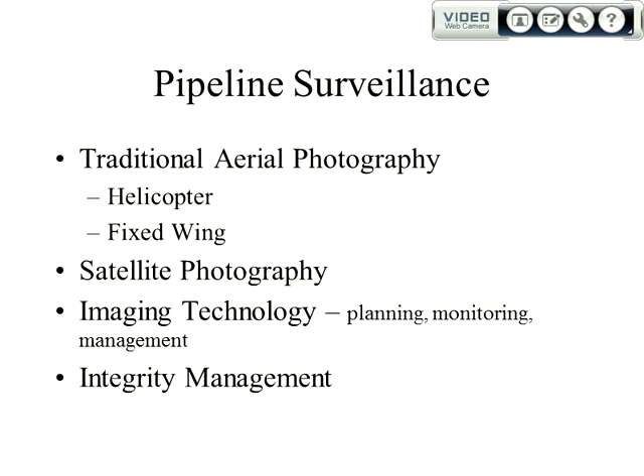This is what I have to find, but this isn't going to work properly. You're supposed to be seeing a photograph of a helicopter and a fixed wing aircraft, which you're not. If this lecture isn't going to work properly, I might need to transfer to the PC.

Traditional surveillance - the key things to remember are that because pipelines tend to be remote from the operating centre, aerial surveillance is often the preferred route, simply because you can pick up so much information quickly. However, walking or vantage point surveys are still important, so remember those techniques are used as well.

This is why you carry out surveillance, and this is the information you can pick up. If you refer to the notes on Blackboard, there's all sorts of information you can pick up through surveillance, but you will only pick up information available on the surface of the ground. You won't be picking up anything about the actual pipeline itself at its buried depth.

There are two main reasons for carrying out surveillance. The main one is to look at any activities or events on the pipeline route which could pose a threat to the pipeline - in particular building activities, land management, or big activities such as quarrying or mining. You're also interested in what's going on around the pipeline, in particular any people who are around it who would become casualties in the event of an accident.

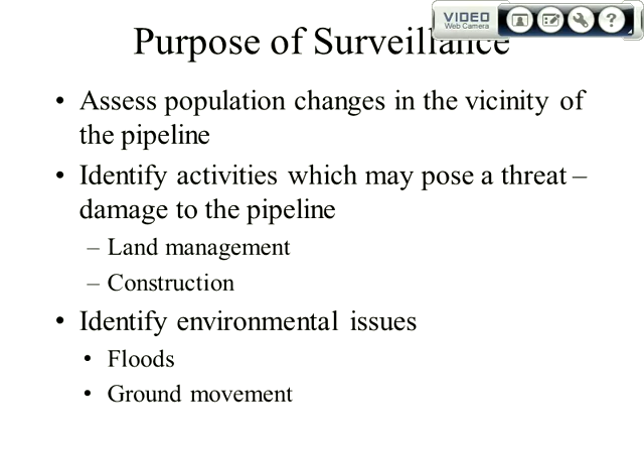In order to survey the route of the pipeline, you've got to know where the pipeline is, and that is achieved by using pipeline markers. There are generally two sets of markers associated with any pipeline route. The first set would be...

Aerial markers, which have got to be visible from the ground and from the air. Typically they would be about 2 meters in height, generally spaced at around 1 kilometer, but located so that you can pick up the route of the pipeline, in particular so that anybody flying the pipeline can pick it up. They've got to mark as accurately as possible any changes in direction of the pipeline route.

The markers have got to include the operator contact details. Now obviously that's not going to be visible from the air, but it will be visible from the ground. The other marker would be a boundary marker, which is smaller, and its purpose is to provide information to anybody who might be legitimately working in that area - typically at road crossings, rail crossings, anywhere there might be other activities going on.

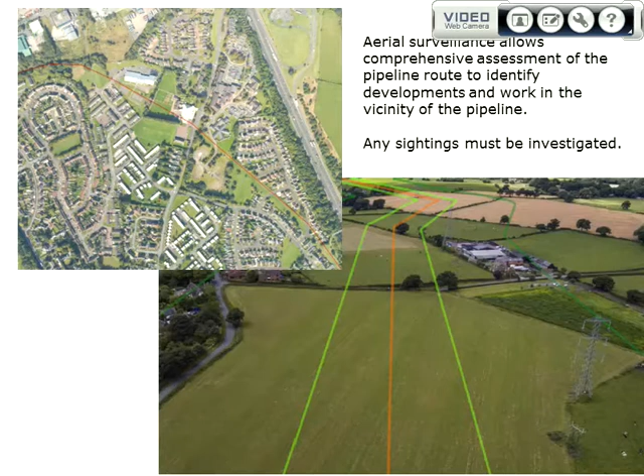One question - so the landowner doesn't see the markers?

Oh yes, the landowner will see the markers on their land, which are agreed with the landowner when the pipeline is first constructed. In accordance with the standards, they should receive regular correspondence from the pipeline operator reminding them where the pipeline is and asking them to inform the operator if they're going to do anything over the way leave. Now, landowners often don't do that, and what happens - we talked in the safety lecture about pipelines being long life assets - is that the land or tenancy changes during the life of the pipeline, and the new landowner takes the view that it's their land, you've got no right to do this, and they'll actually move the pipeline markers and ignore the fact that the pipeline is there.

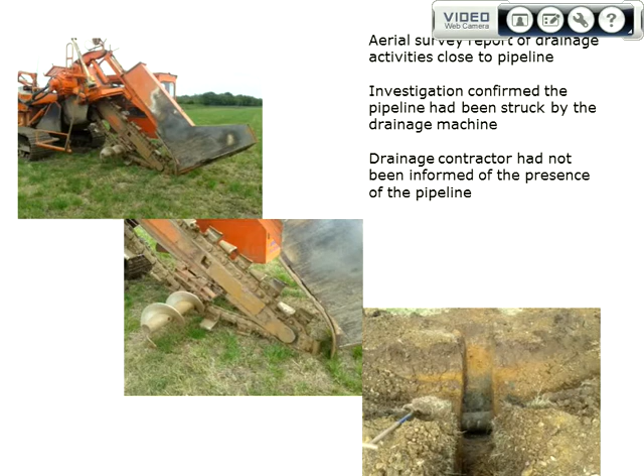Who's the person who actually goes from the operator side? That'll depend on who the operator sends. Most operators will have operations and integrity management personnel, and they'll send them to do that. If the operator hasn't got any staff in that location, they'll have to get some sort of land agent or contractor to go and do it for them.

For this particular example, the pipeline was excavated over where the work had been carried out, and you can see here that the pipeline had been damaged. The damage was, again, typical third-party interference damage. You can see the gouges on the pipeline that have been caused by the drainage machine. This particular incident did require a repair, so the need to carry out the repair has got to be assessed and actioned by the operator.

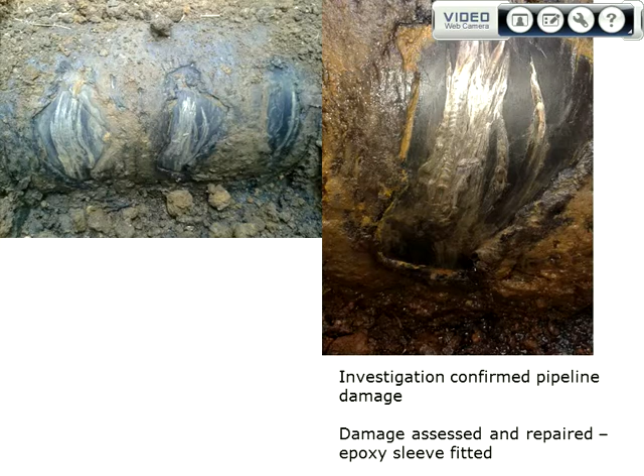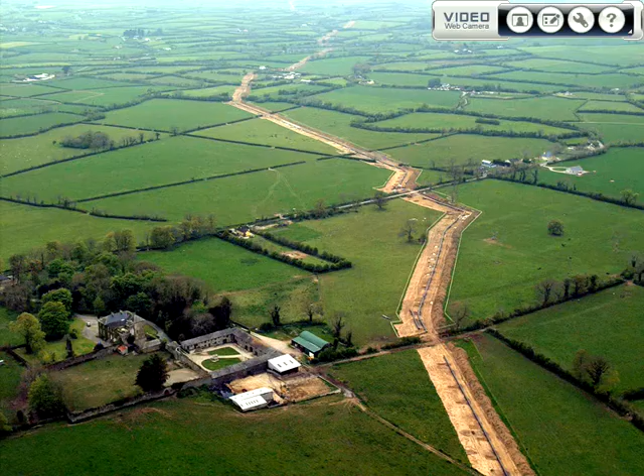So in this one, obviously the route has been reinstated, and here you can see the final stages of reinstatement. That route then needs to be monitored to make sure that the land does recover properly, because in most cases the land will be agricultural, and the landowner needs to know that the land is going to recover properly.

So obviously the landowner has got to do something to manage the land, but the operator has got to make sure that the pipeline doesn't get damaged in the process, and really needs to take a lot of notice of what's going on here, because there'll be a claim for compensation coming in at some point.

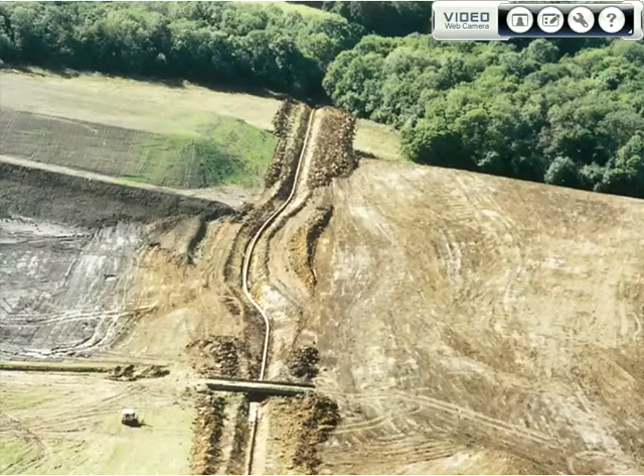The issue is that pipelines are laid on third-party land, so developments can occur in the vicinity of the pipeline. Any developments could infringe the pipeline routing criteria specified by the pipeline code - whether you're in a rural area, where you can operate up to a design factor of 0.72, or a suburban area, where the design factor has to be limited to 0.3.

In the UK, those issues are caught in a process operated by the Health and Safety Executive, where the pipeline operator has to notify the design and the proximity distance. The HSE then notifies the local authority, or local government authority, saying that any planning developments in this zone must be assessed, and HSE will probably object if they contravene the requirements.

Sometimes the process works, sometimes it doesn't. And where a land use planning system like that isn't in place, the onus is on the operator to check whether any developments have infringed the routing criteria.

You've then got to do a risk assessment to check the risk levels posed to the people associated with the developments. So where the developments are with respect to the pipeline is important.

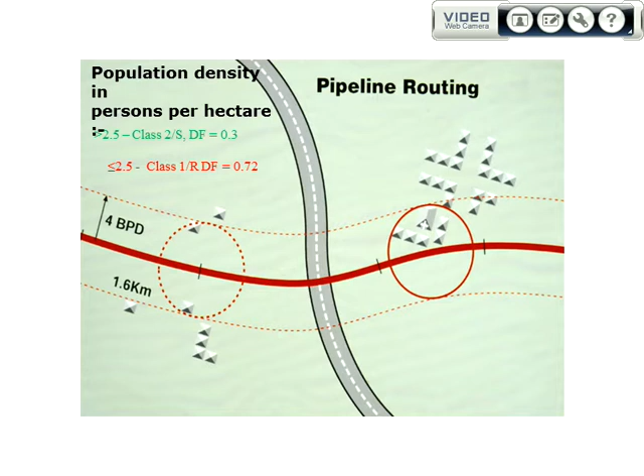Then during the life of the pipeline you could get additional developments occurring, so the pipeline is no longer code compliant, and people could be subject to unacceptable risk.

So you've got what's called a TD1 survey, because the requirements for gas pipelines in the UK are specified by the TD1 standard, which goes into great detail about how you do the survey.

You basically have to assess the development, do risk analysis, and carry out any risk reduction measures which are required.

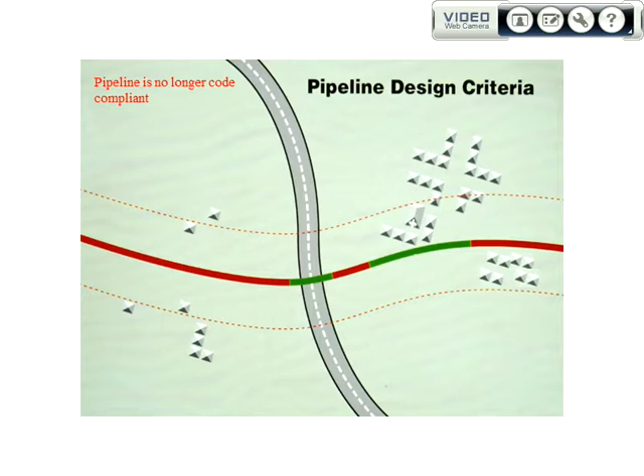As we said, pipeline infringements require a quantified societal risk assessment. QRA studies are carried out to assess the frequency of various harmful events - mixtures of leaks, ruptures, etc. - which could cause casualties within the pipeline hazard zone.

Remember, the hazard zone depends upon the diameter and pressure of the pipeline. Each event will have its own frequency and will cause a different number of casualties.

In other words, the frequency of small leaks, large leaks and ruptures are all going to be different, and the hazard zones associated with each are going to be different. The hazard zone is then going to capture people in the vicinity. So you've got to do all of those calculations and basically construct the site-specific F-N curve so that you can compare that to a criterion.

The key thing to remember is the risk is dependent on the proximity to the pipeline. The closer the population is with respect to the pipeline, the higher the risk. And the area classification, which is based on the population density, will control the design of the pipeline, in particular the design factor and the wall thickness.

A summary of those two slides is quite important. Right, now this is actually how essentially the process would unfold.

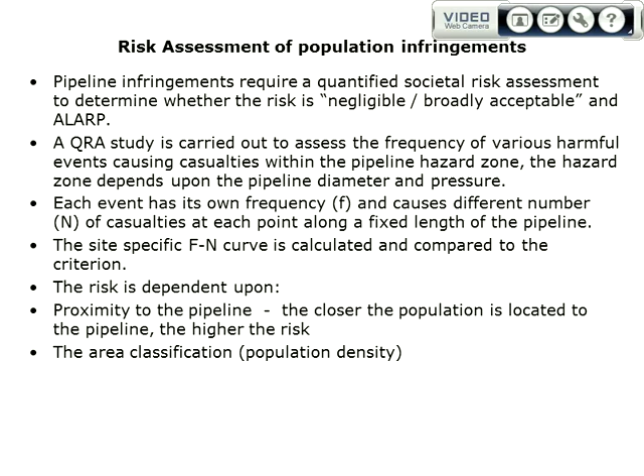Housing estates, villages, housing - that's all to do with residential populations. Industrial estates, shopping precincts - that's all to do with commercial and leisure interests. So you could have large numbers of people there, but the locations are probably controlled, and people aren't living there. They're not going to be there all of the time.

Caravan parks are every pipeline operator's nightmare because caravans do not provide any protection to people in the event of an accident, and obviously they're highly mobile, so they can appear anywhere.

So on one particular case, you've then got to go through each of these locations and carry out the risk assessment. This particular example is looking at one of the industrial estates. So you've got to plot the pipeline.

Now I'm going to talk a bit later in this lecture about using virtual globes like Google Earth. This is a typical example of using Google Earth. So you plot the pipeline route onto the ground surface, and then you start mapping out different sections of the pipeline.

Because you're going to have to count people in each of these, and you're going to have to estimate the population density, and you need to plot the hazard distance associated with the pipeline in the event of an accident. That breaks up the population associated with the pipeline into discrete sections that you can go in and count reasonably accurately.

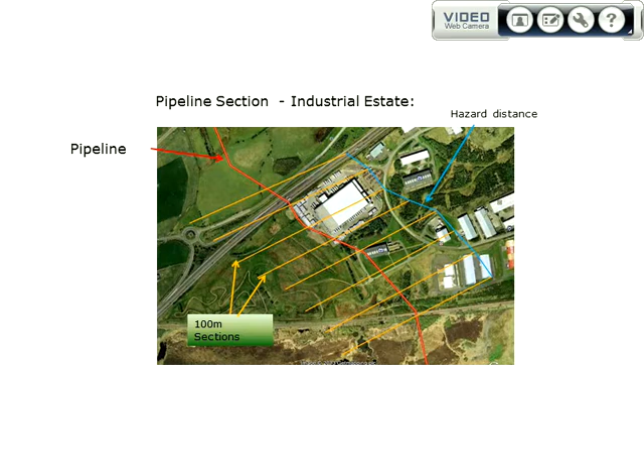So you've got to try and estimate what sort of numbers of people could be involved, and then you've got to consider when are people going to be there. Are they going to be there all the time? Is the occupancy going to vary with the time of day?

You've then got to plot the population on some sort of grid, which is then going to allow you to do the failure frequency calculations and the hazard distance calculations associated with those.

What that means is it's essentially exceeded the criterion, so it's in the ALARP region, which means you've now got to do a full cost-benefit analysis of the risk reduction measures that could be applied.

I said that we were going to look briefly at some imaging techniques. The imaging technique which is probably most widely used at the moment is LiDAR, or light detection and ranging survey. Essentially what this does is use a number of sources of information to create 3D images of the location, and it's used for a number of issues.

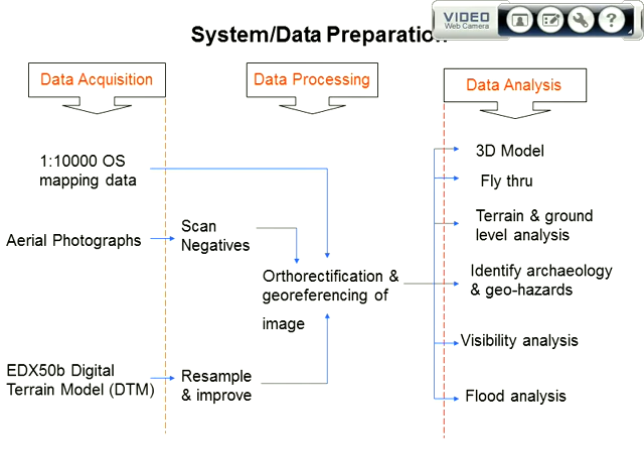You start with the map, which has got a lot of accurate information on it, and then you superimpose with the map the aerial photographs. Aerial photographs give you a much better feel for what the land looks like and what's going on, but they don't have the level of detailed information that is available on a map. So you've got to merge the two.

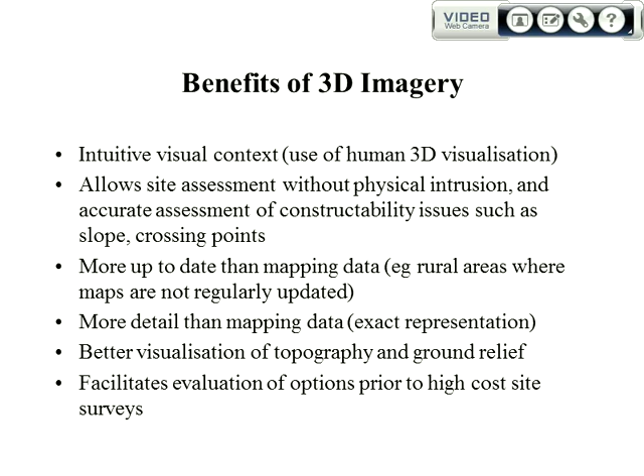In order to get essentially the 3D image of the ground, what you do is basically take a number of photographs and laser images of the ground. Essentially it's the laser pulses which are going to be constructed or used to construct the 3D image.

Right, so this is an example of how you create the image. You've got the aerial photograph and the mapping information. If you were doing a pipeline construction project, you would also need the geological information. And then this is the terrain data that you're collecting from the LiDAR survey. So you've got to merge all of those things.

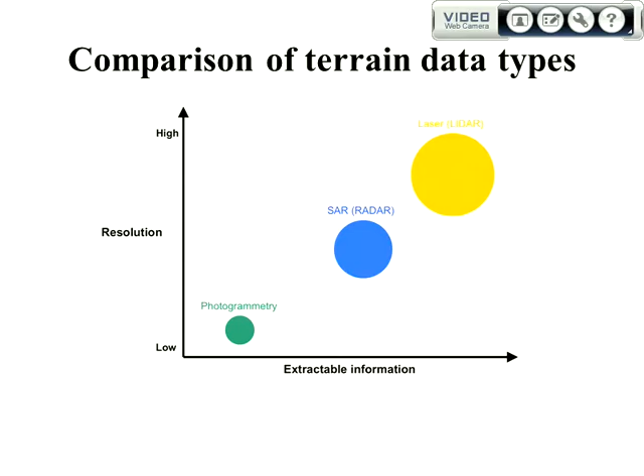Obviously, depending, sometimes it might be helpful to have it in color. In other cases, it might be more helpful to have it in black and white, because our black-white grayscale can give you a more accurate assessment of any changes.

And then you can use this to actually understand the profile of the area, and in particular the details of the profile where you're thinking of putting your pipeline. And you can do detailed analysis of certain sections.

For example, this is showing the elevation model and terrain model associated with a road crossing, which you can then use to say, right, okay, I'm going to design the pipeline road crossing taking this information into account.

Archaeology, obviously, because it's taking detailed information of the ground surface, there is the possibility that you can identify where you've got archaeology. Archaeology is the bane of pipeline operators' lives, because anything identified as having archaeological interest has got to be thoroughly investigated before you start constructing and obviously then destroying it.

Flood analysis, as you know, is becoming increasingly important. Because you've got a good 3D image of the surface, you can easily do flood analysis where you're basically just putting a straight horizontal surface over it, so you can say, well, if it does flood, where's the water going to go?

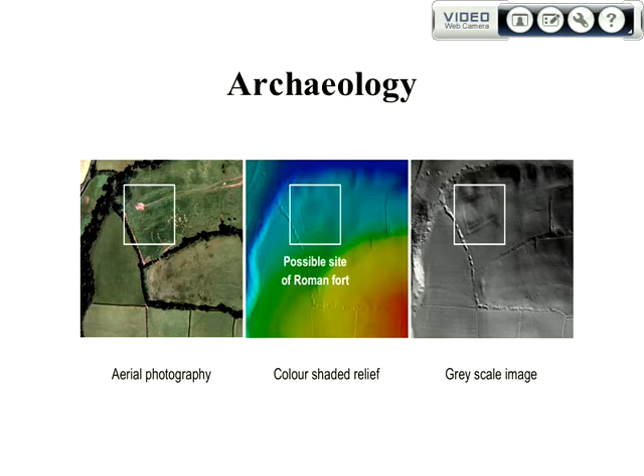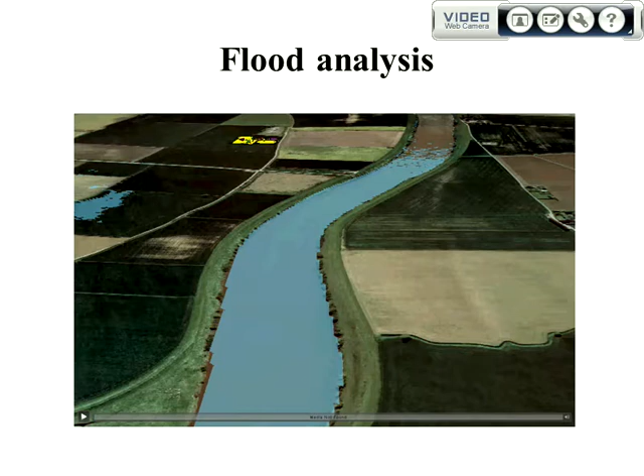Once you've created this image, you've got a major data source that will allow you to bring in other sorts of information. You've got the as-built details, you're collecting ongoing inline inspection data, and relating both of these back to a GIS system. Once you've got that, if you collect detailed information about pipeline integrity, you can incorporate that in the system as well.

Here's an example where you've got that information and you're superimposing the details of the pipeline from inline inspection. The inline inspection has identified somewhere you need to go and investigate, so you can layer in the inspection, the assessment information, detailed photographs of what you've found, and also include predictions. So there's the possibility of bringing all of this information into a very useful database.

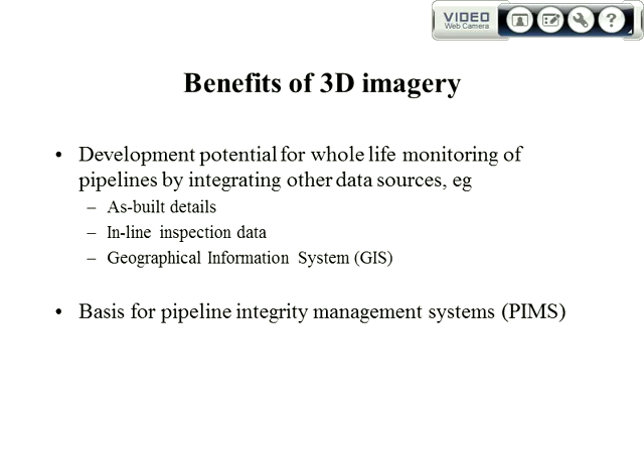Then, in terms of understanding inline inspection data, it's often useful to see the route of the pipeline over an image, for example a Google Earth image, and you can say, okay, we're picking up corrosion in this location, what's there that might be causing that corrosion.

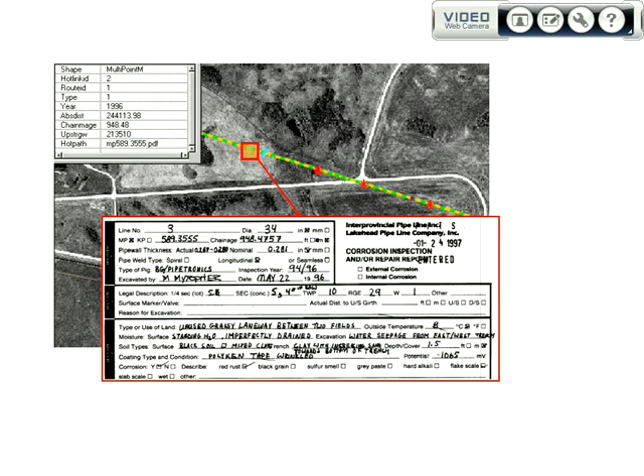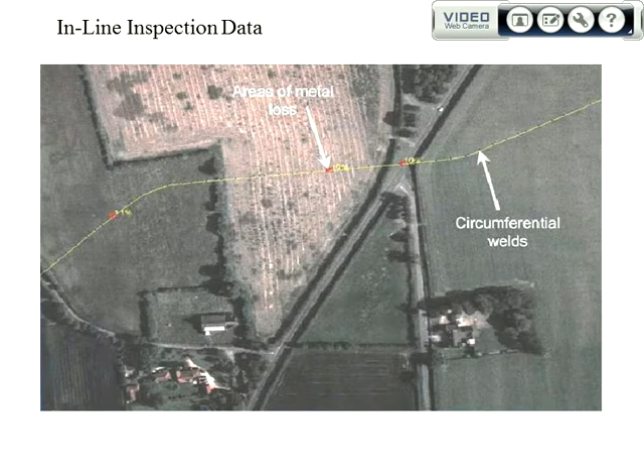This is just another example of what I showed earlier. You've got the pipeline route. This is actually a cleverer one because they have mapped on the variation in the distances according to the design of the pipeline. Then that needs to be related to map information so that you can identify as accurately as possible the developments associated with that.

Just to reiterate the use of virtual globes, a lot of pipeline information will be immediately available to you in map form, but if you compare that with the information from a satellite image, a Google Earth image, you can see you're going to get a lot more detailed information, and depending what that location's like, you may even be able to go in and look at a ground level view. Obviously you can't do that if it's very remote, but where you're doing risk analysis and looking at pipelines in the vicinity of people, you can go down to ground level and do the assessments very quickly.

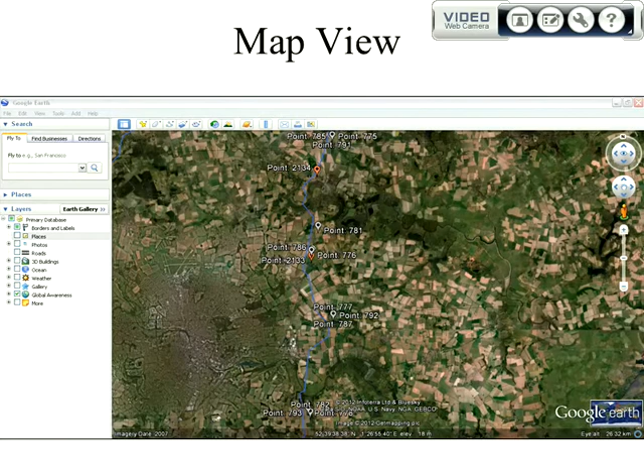So what you find, particularly if you're involved with pipeline integrity consultancy, is that you'll often be asked to quickly assess information that the operator's picked up, for example from inline inspection, and what you need to do is relate that very quickly to the ground and area around the damage. Use of systems like Google Earth allows you to do that very quickly and make quite intelligent assessments as to what's going on.

This series of examples just shows that you can use things like this to monitor the right of way. Most operators would not rely on something like this - they would use much more detailed and accurate surveillance. But there could be locations where you're doing work for an operator, and if you go back and see a sequence of images, you can track the history of what's happened.

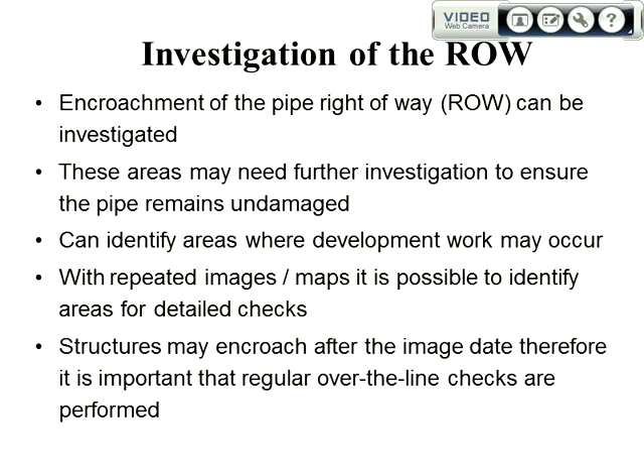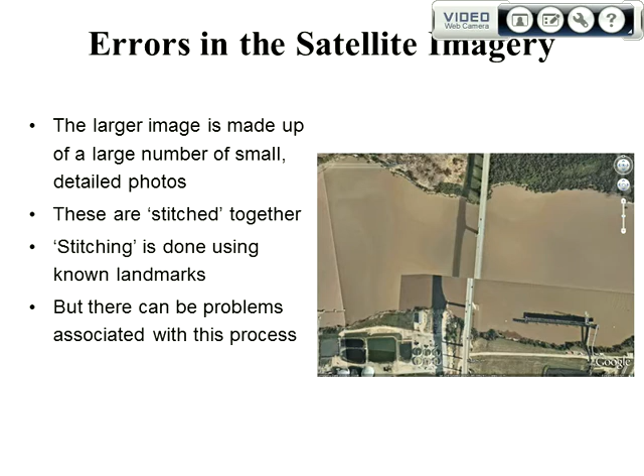For people getting involved with this area now, the use of virtual globes is very important because it allows you immediate access to locations in the vicinity of pipelines. They provide a lot of information, but you've got to be careful how you assess and use it.

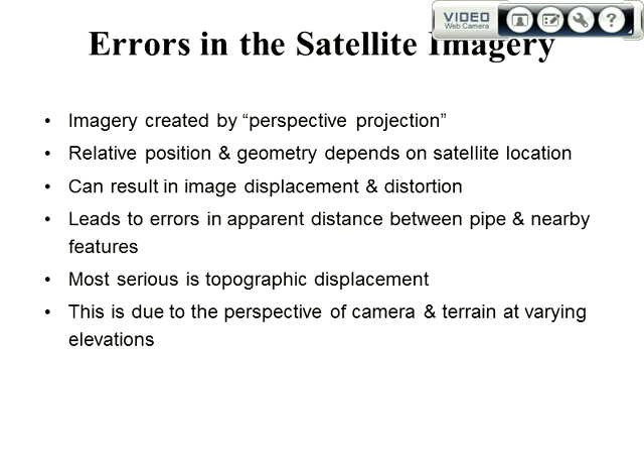Aerial surveillance - what is the duration when an operator starts aerial surveillance? Is it weeks or days? Are you talking about a new pipeline? Yes. Normally you would start aerial surveillance immediately before the pipeline is commissioned, and the pipeline standards tell you to do it every 2 weeks.

Has anybody got any questions or points? Yes, there was a map, maybe 7 slides before, where you showed the metal loss with red dots. How did you identify this metal loss? By inspection - the metal loss would have been identified by the inline inspection tool, and then it's transposed onto the integrity management system, which includes the full GIS of the pipeline route. If you include aerial photographs or virtual globe images, you can see exactly what's going on, and therefore whether there's something in the environment causing that.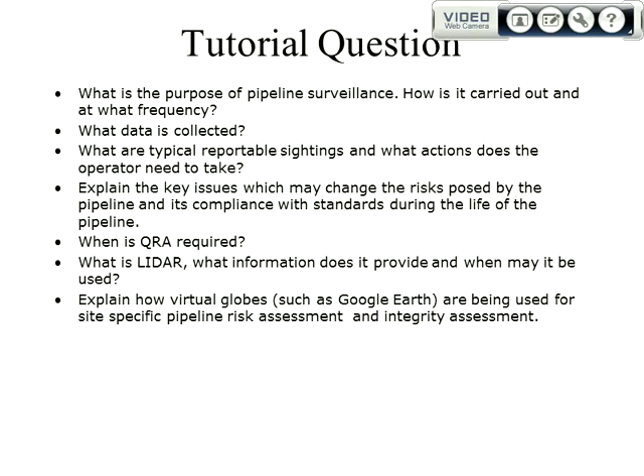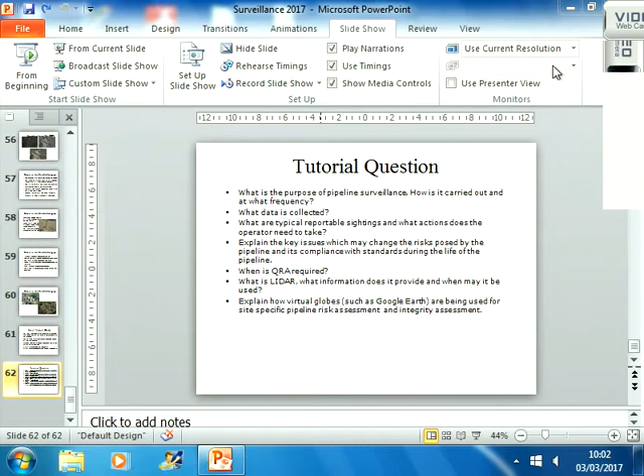I found that after your lecture slides, it was very different - none of the photographs are included. Are they the latest ones? I checked the 2017 project. Let me have a look, especially for presentation. And this tutorial question isn't in... there's a separate file called tutorial questions, but it's not the same as what you showed us here. Right, hang on, let me have a look, see what I've got. Right, so these are the notes. I think there was a particular slide that you said was important but you didn't have it inside here. There was another slide, but we don't have that slide. I thought there was a slide of a process concept, but we don't have it. No, you don't - I haven't included the slides on how you do this, because I'm not going to interrogate you on how you do it. You need to know when you need to do it and why you need to do it, but I'm not going to challenge you on how you do it. Does that make sense? More or less. If you want any of the additional ones, I'll... this is the first time - I think these are okay.

Where are we having lunch then? Yeah, that's the point. So which were the ones, you tell me which are the ones to go ahead, we'll see what you're worried about missing out. It just takes ages to load, that's all.

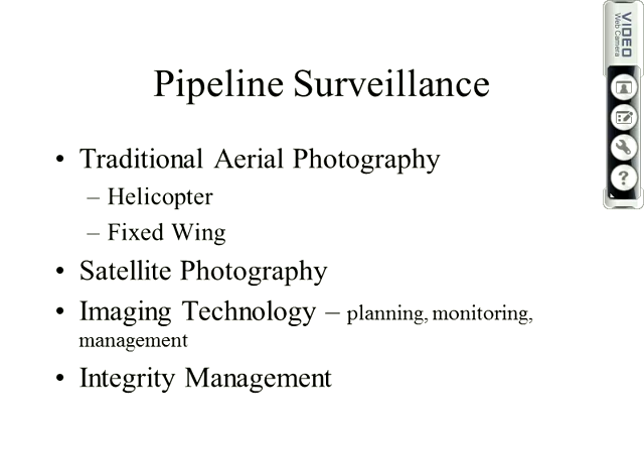Have you done the QRA lecture yet? We have introduction to QRA. So I think Garry Goodfellow does that. Yes, I think that was his name. And I'm sure he does a second lecture, where he'll go through things in much more detail. So I'm really just trying to show you the link between surveillance type things and how you link it to QRA. But I'm not going to ask you about actually doing the calculations. Okay, that's good. Is that alright? Yeah, right, that's why I want to take a break.

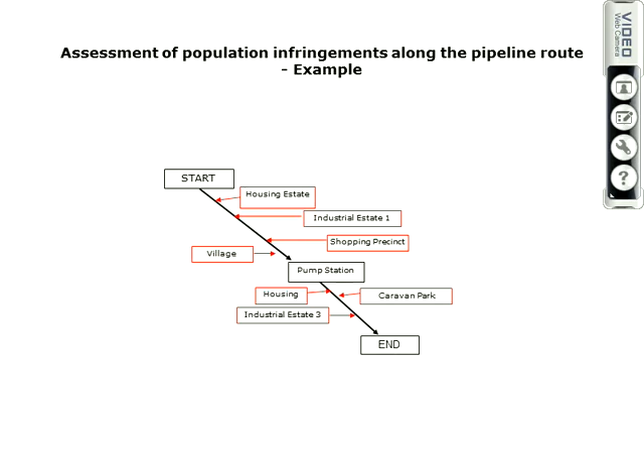Matthew's turn to try. I'm sure my voice goes so much. I'm sorry to bother you. I've just got a quick question. I was speaking to Gary, one of the external lecturers. Oh yes, I work with Gary. Yeah, and you mentioned that you've done some work with corrosion growth rates.

Is that right? Because that's actually what I'm doing for my dissertation, in terms of from a deterministic and probabilistic point of view. So I was just wondering, because obviously it's not linear, the corrosion rate's not linear, what else, other than soil resistivity and temperature, impacts the corrosion rate?

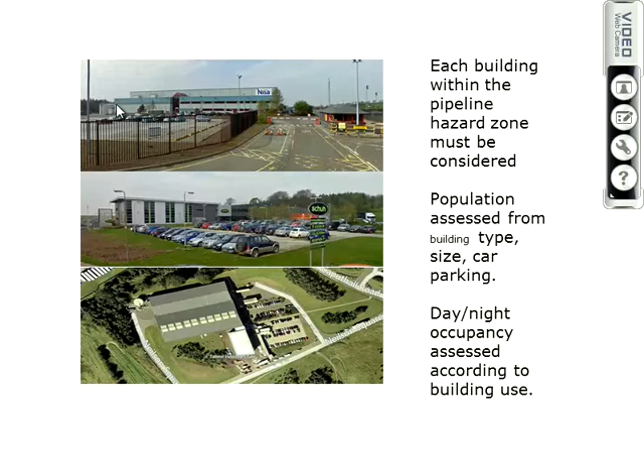The key issues obviously are soil resistivity and temperature, they are the primary ones. But for most pipeline situations, the key issue is whether you protect the pipeline to start with. So you've got coating and you apply CP, so the coating is the primary protection. The first issue is when that starts to break down, the CP will then start protecting, and the CP will affect the corrosion growth rate. So if the CP is working well, you should expect to have virtually no corrosion growth. However, the CP system will age with the pipeline, so as the ground beds get older, they don't quite give the level of protection. If the coating gets very damaged, the CP system will have to work harder, so local issues won't be avoided. That's probably the most difficult issue - modelling corrosion growth and linking it to the aging of the coating and the performance of the CP system.

Could I relate that to different environments, like an Arctic or desert environment? You should be, I mean there are publications around that. If you write to me and ask, I'll send you some references that we've been using for that, which might be helpful.

What we've been doing is modelling corrosion growth probabilistically, so that you can then say to the pipeline operator, well, if we make these assumptions about how good your corrosion protection is, this is what we think is happening in your pipeline, and therefore this is when you should expect it again.

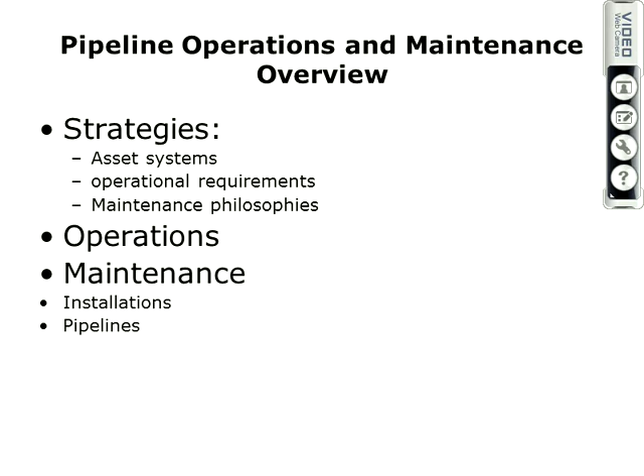Pipeline networks are probably mainly associated with gas supply systems anywhere in the world, because in most cases, once you've started supplying gas, particularly to domestic properties, you've got to keep supplying it. You can't just easily close down parts of the network and expect that whatever's connected to the end of the system is going to remain safe. So there are different issues.

Often you find with liquid pipeline systems, once the operator finds they've got damage or a problem, they will just stop the system, decommission it and sort it out immediately. With pipeline networks supplying gas, the operator may not be able to do that. They may not be able to immediately isolate the system because there will be demand requirements. You don't just suddenly want to cut people's supply of gas off. So you've got to balance these different things.

You also have to take into account the characteristics that you're dealing with. For pipelines, they're often located in remote locations, buried, on third-party land, and generally unmanned and subject to remote operation. So you've got to take all those things into account when you're thinking about the operations, what information you want.

And the maintenance, what interventions are you going to carry out. Installations associated with pipelines are generally simple processing plants. Anything complex will probably not be on the pipeline; it will either feed into it or take whatever it's delivering. Usually above ground, normally in a secure and controlled compound, and they will have a major influence on the pipeline availability.

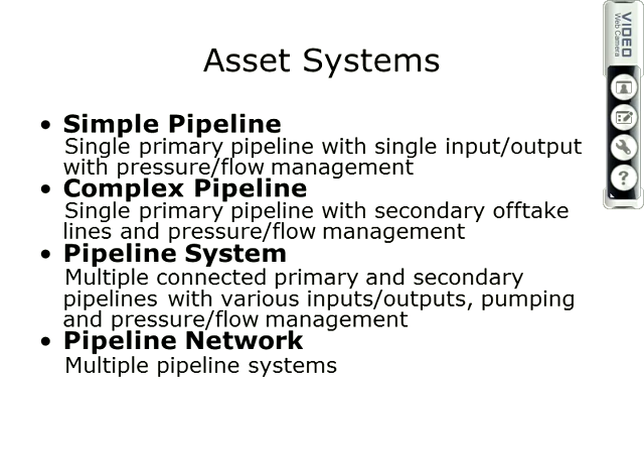Operational requirements - you've got to consider the mode of operation of the pipeline. Is it continuous flow? Continuous flow typically would be some liquid systems supplying critical fluids, for example in the UK pipelines supplying airports with fuel. You might have batch and cyclic flow - some liquid pipelines transport more than one type of fluid, sent in batches. One day it might be transporting aviation fuel, the next day gasoline, and that will introduce cyclic duty in the pipeline.

You may have non-critical availability - in other words, if the pipeline goes down for a few days, it's not going to cause any major issues. Or you might be dealing with a critical system, for example a major part of the gas supply system.

Then the other issues you've got to think about, more associated with installations, are whether the assets are standalone or have some sort of redundancy available. And what about safety devices? Safety devices associated with pipelines are very important, because if the safety device is set wrong or if it doesn't work, you've got the potential to overpressurize a pipeline, which might be routed very close to population at some point.

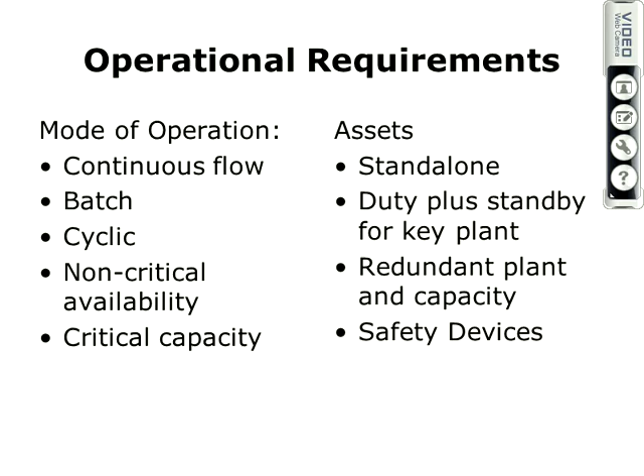Operations involves system checks and testing, basically because everything's remote - going through sequences of activities just to check that it is actually working and sending relevant information. And obviously operations are in charge of safe control of all activities associated with the assets, in particular isolations, decommissioning and recommissioning of plant.

So the majority of operations activities centre on monitoring and control through the SCADA system on the pipeline, and they are key to the coordination of activities on the plant.

In terms of setting control limits, one of the responsibilities in the operations centre will be to keep detailed records of, in particular, the pressure. Remember, the pressure of the pipeline, particularly high pressure pipelines, it's a statutory responsibility to notify and demonstrate that you're keeping it under control. There are a number of issues recorded here - obviously the maximum incidental pressure of the pipeline will be noted.

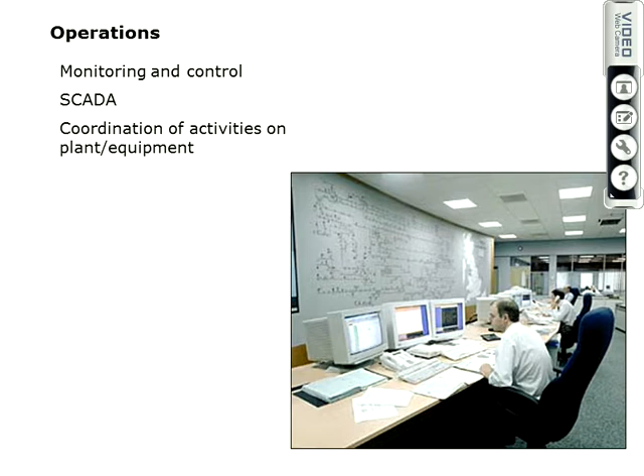That is normally what you would take as the safe operating limit of the pipeline. So you've got the maximum incidental pressure and the operating pressure, and you've got to have a margin between these two things because you've got to try and control it. Basically, anything that exceeds your normal peak operating pressure would normally be notified to the regulator, and if you exceed the maximum incidental pressure, your operation is essentially illegal, so you're likely to get some sort of prohibition notice.

So one of the key things here is establishing your peak operating pressure in relation to your operating pressure. This will be associated with the characteristics of the control system, because control systems will never control to a dead limit - there will always be a variation above and below. So you've got to establish what that is, decide whether it's reasonable, and keep records to demonstrate you're in control of that.

The other issue, in particular for gas systems, is temperature control. Obviously, if you are operating installations which are going to reduce pressure and feed into other systems, when you reduce pressure, you're going to significantly drop the temperature of the gas, which could damage the equipment itself if you allow very low temperatures to occur over long periods of time.

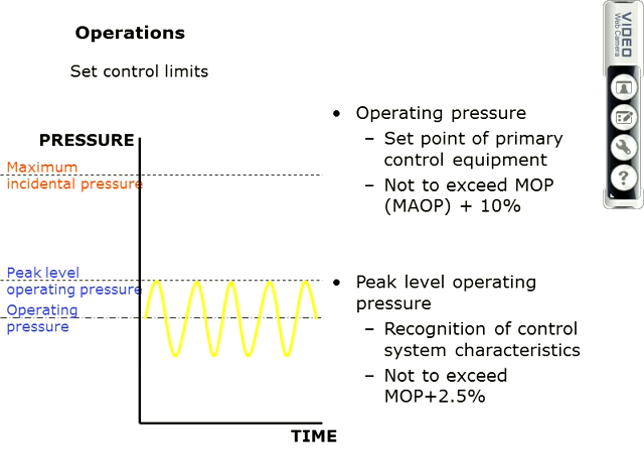Right, the maintenance of installation. There are lots of different strategies you can consider here, but the maintenance strategy really needs to be devised based on the likelihood and consequences of failure. Your immediate thought would be safety consequences, which of course are true, but you've also got to consider failing to supply, and also the business risks as well. So you've got 3 levels of risk to consider: safety, security of supply, and economic. In the absence of other approaches, the current best practice is to move to some sort of risk-based approach.

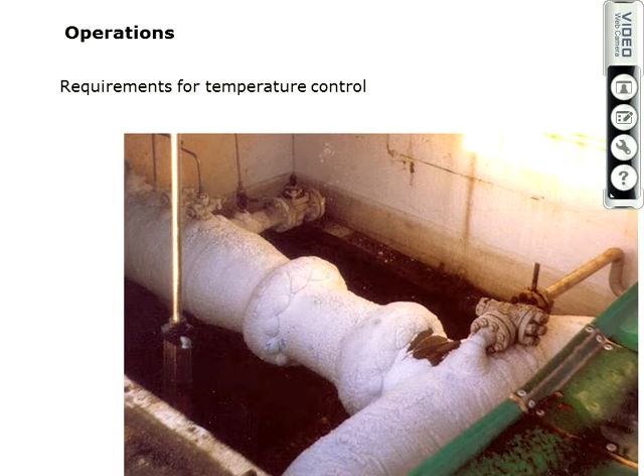However, to move to a risk-based approach, you've got to have data. So in most cases, if you haven't got data you can rely on, you would fall back on equipment manufacturers' recommendations.

A couple of just tedious definitions here. Essentially, you're carrying out maintenance to make sure the physical assets carry out their intended functions as required, and it's important to recognise it's a combination of management, technical and administrative actions which need to be carried out. The administrative actions are probably the most difficult and the most important. This is to do with actually scheduling activities, recording that the activities have been allocated and then carried out, and what's the outcome of those. Obviously if you're dealing with extensive assets, that can be quite onerous.

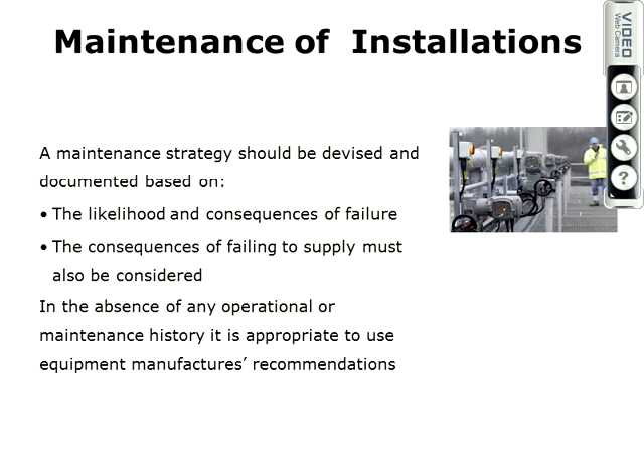Right, in terms of strategies, this is a typical list of maintenance strategies. What you would find, certainly for any pipeline system, is that you probably wouldn't actually use any one of those individually. You'd probably use a mixture of those. And the strategy you apply to some extent depends on what resources you've got available.

For example, if you need to retain emergency standby teams on your pipeline assets, then you don't really want an emergency team sitting in a control room playing cards and doing nothing, so you may as well come up with useful activities they can go and do on the plant, which keeps them familiar with how it operates, etc. However, if you don't have a requirement for an emergency standby team, then you would perhaps want to minimise the activities that you carry out.

Also, if we now think about the data that you're going to need, that will depend on what monitoring you've got, what fault data you're recording, have you got any failure finding procedures in place, and have you got a good data capture and database recording system.

There's a couple of slides here in the notes which basically give you the summary of advantages and disadvantages of the different types of maintenance. Breakdown maintenance - people would say you really wouldn't choose to go to breakdown maintenance, but for some assets you probably would, because if you think about valves, there's not a lot really you can do to a valve. If it doesn't work, you've got a problem, and therefore we'll use breakdown maintenance for most of the valves on the system, which means you've got to hold spares, etc., and you need to know what to do if you do have a breakdown.

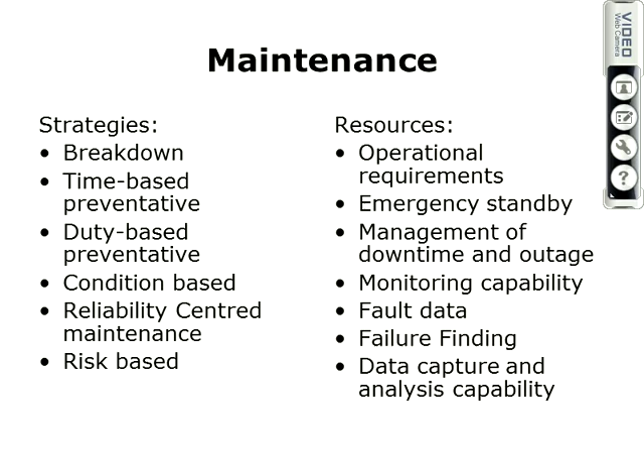This regular time-based strategy is probably the easiest to apply. It certainly makes planning and management of resources easier. However, the problem can be optimizing the interval. It's very easy to set scheduled maintenance at frequent intervals, and then to find that you're spending all your time chasing administrative tasks and you're not actually doing anything useful. So that needs to be thought of.

The next stage there would be to say, well, really you need to bring in condition as well as time. The issue with condition is you've got to be able to monitor changes in parameters, and those changes, you've got to be able to pick up and be able to use reliably.

Scheduled overhaul. Again, this is very easy to manage, and generally scheduled overhauls will be applied to redundant and safety critical plant.

They are high cost, and therefore if you can move to something like reliability centred maintenance or risk-based maintenance, where you're homing in on identifying the components which really do need to be maintained, because if they fail, you're going to have a major problem.

So these offer you a lot of advantages. They are also high cost, mainly because eventually they will home in on the need to carry out onerous and expensive activities. So moving to RCM or risk-based doesn't necessarily reduce your cost base, but it does allow you, once you're collecting the data, to be in much more control of what's going on.

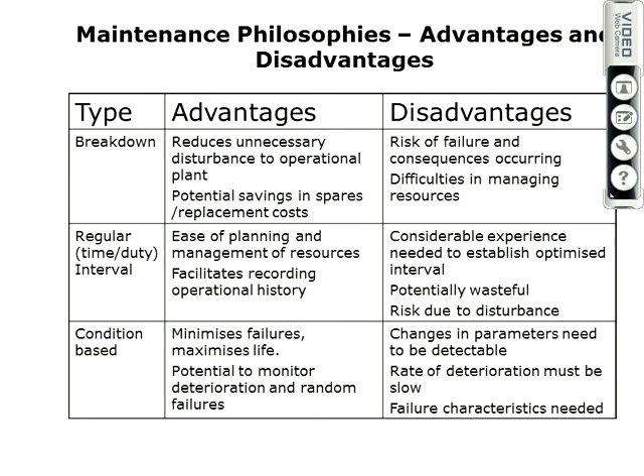Risk-based maintenance, as I said earlier, is probably what is recognised as good practice now, and most of the pipeline standards that cover operations and maintenance will encourage people to go down this route.

However, you need to bear in mind that if you're going to apply it, you've got to have a good inventory of your equipment. You've got to keep a comprehensive history of all occurrences, of any defects or failures, and the work undertaken to correct them. And you've got to be able to rely on that data to define activities and frequencies.

The number of factors that need to be considered includes the age and standard of construction. In the safety lecture we mentioned the fact that as pipeline standards change, you've got to consider that you may be operating something which is 40 or 50 years old and doesn't meet the requirements of current standards in terms of design and construction.

So how do you deal with that? You've got to deal with it somehow in the operations and maintenance strategy that you apply. You will be collecting a lot of information through inspection and maintenance, and monitoring - certainly for pipelines, the results of CP monitoring are very important.

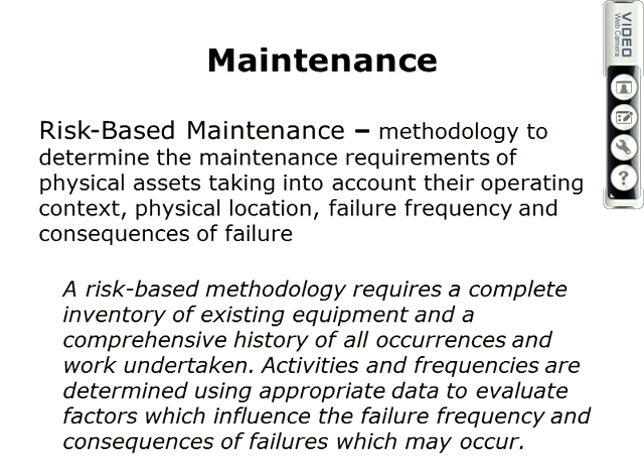Local ground conditions and the environment, infrastructure, population density - all of these will direct you towards particular high-risk situations. Operating pressure and temperature history, safety consequences - in other words, the key thing there would be the hazard range associated with any failure that may occur, and the operational consequences in terms of loss of availability.

So, risk-based maintenance requires some sort of event tree model. As you do risk analysis, you'll see a number of event tree models, and the key thing there is really defining quite accurately what could happen and then associating probabilities with that outcome.

You've got to make some attempt at predicting the frequencies of failures, and you've got to do some hazard analysis, which then feeds into the modelling and prediction of consequences. And then finally you've got to do the risk analysis, where the risk is equal to some function of the probability of failure times the consequences of failure.

Now, when you're doing risk-based maintenance, on this course you will be looking at quantified risk assessment, which is absolutely essential and very important for pipelines, particularly for safety aspects.

When you're doing risk-based maintenance strategies, you often will not have adequate, what you would really call adequate quantified failure probability models, and you may also not have proper consequence models. So you will be moving from a fully quantified approach to either a semi-quantified or a qualitative approach. And as you make those steps, you've got to take on board where you may be losing serious accuracy in what you're doing.

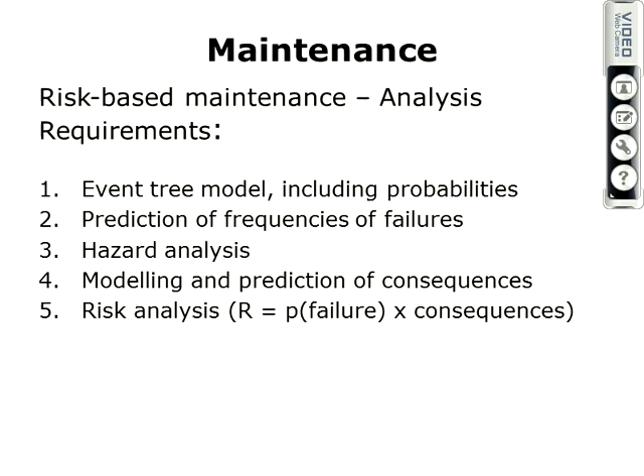A typical example here: there's a lot of interest in the pipeline industry at the moment in moving to risk-based scheduling of inline inspection. What can go wrong is you could get metal loss, which could lead to failure. The consequences of it going wrong would be a leak or a rupture, and you've got to think about those consequences along the length of the pipeline. And then how often will it go wrong? That depends on modelling of corrosion rate. So you've got to think about applying that approach to every specific activity and damage mechanism that you're considering.

Okay, so just taking this one step further, you've got to have some form of risk model. With what we've just been talking about, you would need a corrosion growth model. And if you were applying this to surveillance, you would need to think about if you reduced your surveillance interval, what would that do to the likelihood of you missing any third-party activity in the vicinity of your pipeline that could cause damage. So in this situation you're going to have a corrosion growth model, and in this situation you're going to have a model giving some sort of prediction of the activity levels around your pipeline.

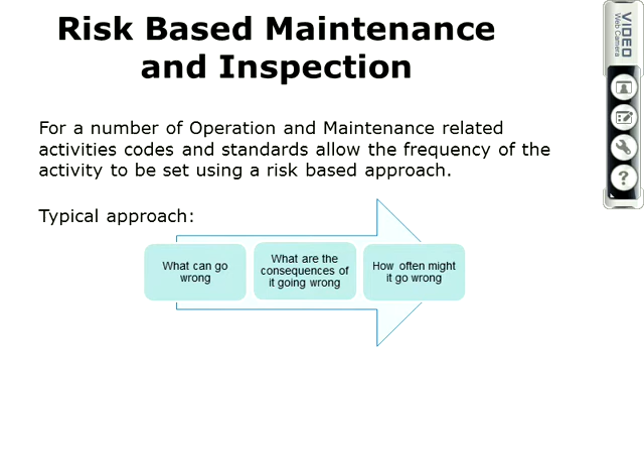And you've got to be able to demonstrate that if you adopt the risk-based approach, the frequency will not result in an increase in risk. So you can see that although there are a lot of strong advantages of taking this approach, it's actually not necessarily straightforward or easy to do. You've got to think about it properly. And the last point is damage and failure data is key to being able to do it properly.

I won't go through this in too much detail, because essentially this is really just common sense. These are the main activities, or the main strategies, and risk-based maintenance is essentially a mixture of all of those things that you've selected based on the risk assessment that you've done.

Then it depends where you're going to apply them. It's important to remember that in some cases, where you're dealing with safety devices and pressure vessels, there will be statutory requirements you've got to meet. These will mean you've got to do tests and checks at certain intervals, and certainly on pressure vessels you have to have authoritative inspections carried out at regular intervals during the life of the vessel.

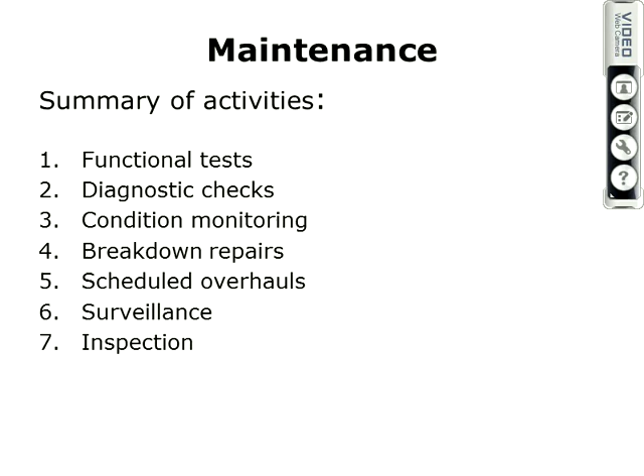This is just a photograph of a typical fairly old gas installation, and you can see there's different sorts of equipment which will have different levels of criticality. We've got water bath heaters in the background, the pressure control equipment here, there are filters and things. You could say, if you go in and do everything required on that site, that could be quite an enormous workload. But equally, if the site's remote and you've got to get people and equipment to the site to do the maintenance, why not just do everything at once? So there's a balance that needs to be considered here.

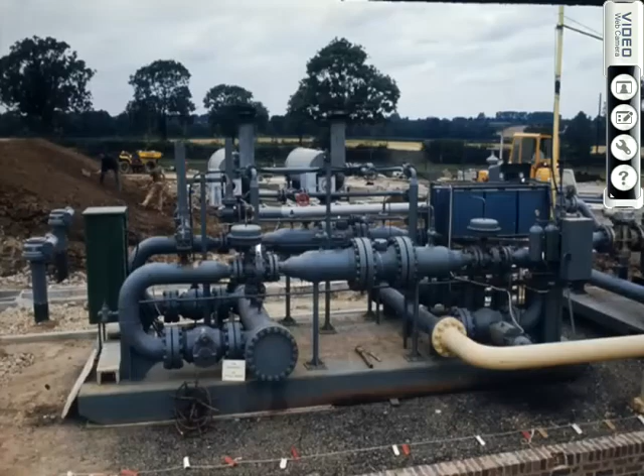Now, these two slides that I'm going to show you now are quite important. They're in the notes, all right? What we're looking at here is what sort of activities do we carry out and what frequencies do we carry them out at. So, routine checks, basically that is standard for the sites.

The sites are all unmanned and remotely operable, so you've got to visit them every now and again just to check, is everything still there and is it still operating, is it still set to operate at the right level. That is basically just a routine security check, is everything okay?

Then you've got to think about functional checks. That's to do with making sure everything's working, and in particular the safety devices are okay. It applies to virtually all of the equipment on the site, and the frequency varies typically between, say, once every 4 months, perhaps going up to every 12 months. If you can push it beyond 12 months, you would, but that would depend on the components and how they're behaving.

Then you've got the major overhaul, which applies to all the key mechanical equipment. So typically on a pipeline installation: pressure control equipment, the small bore controllers, which are probably going to be one of the biggest headaches, heaters, valves, filters and meters. Generally you would schedule that in accordance with the manufacturer's recommendations, mainly because if you don't and something goes wrong, the manufacturer isn't really going to be very supportive if you're looking for any kind of help or compensation. Equally, if you've got good operational data which allows you to make the decision to change the frequency, then you would.

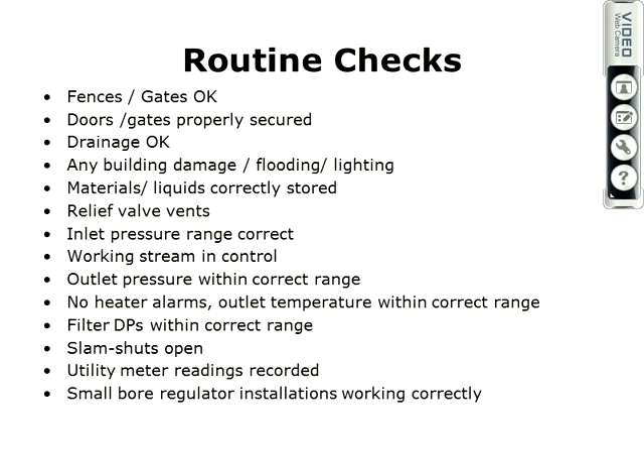Then, depending on what other equipment you've got, heaters, for example, can end up being very costly to maintain, so it's always good to have a good functional check routine to anticipate any problems that could be building there. And certainly your pressure control equipment will actually consist of a number of different components, so does the assembly itself work properly?

Right, okay, so here's a tutorial question to consider. A pipeline inlet pressure reduction station includes regulators, valves, including the ESD, filters, preheaters, and a pig launch facility. The outlet pressure reduction station includes regulators, valves, and a pig receipt facility. So the inlets and outlets are not terribly different, they're just operating at different levels. Describe the maintenance requirements for this installation. Based on what we've covered, do you think you could do that?

So you describe the maintenance requirements for this installation. The maintenance requirements are going to be routine, functional, inspection, a pressure systems type inspection, and major overhauls. Can you apply this, like for the filters and preheaters, a different strategy? Well, you need to think about it. Would you do the same for a heater as you would do for a regulator?

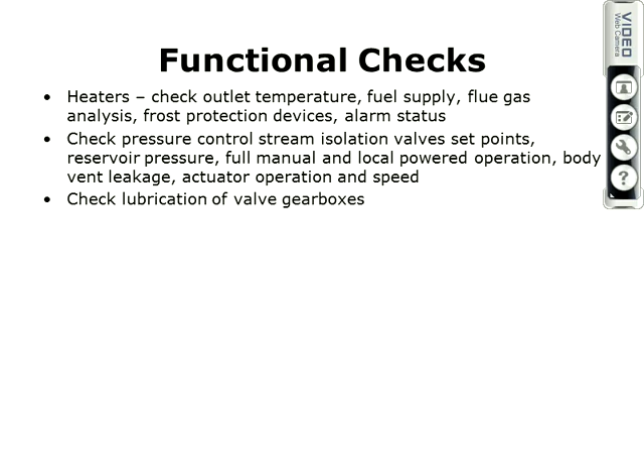We will apply a different strategy for each system, like heating systems and heaters. For all of the components, you're going to have to do routine functional inspections and major overhaul activities, and the frequencies you apply are going to vary according to the type of equipment.

The key differences in features are in the table, and the frequencies are in the table that I've given you, which is in the notes.

So we don't need to mention strategy, but like you listed strategy, no? No, the way the question is worded, I'm not asking you for strategy. I'm just basically saying what do you need to do, and typically when would you do it. I'm really expecting you to say the activities you need to do are these ones, and typically you would do them at these frequencies. I'm not expecting you to write a detailed justification for why a particular component would be worth an RCM strategy - I'm not looking for that level of detail.

In terms of the examination, does each external person who comes in set a question each? Like how is the format? Well, it's sort of evolved over time. I am normally asked to set 3 questions. Other lecturers might only be asked to set 1. But how many questions are there overall, and how many do we need to answer?

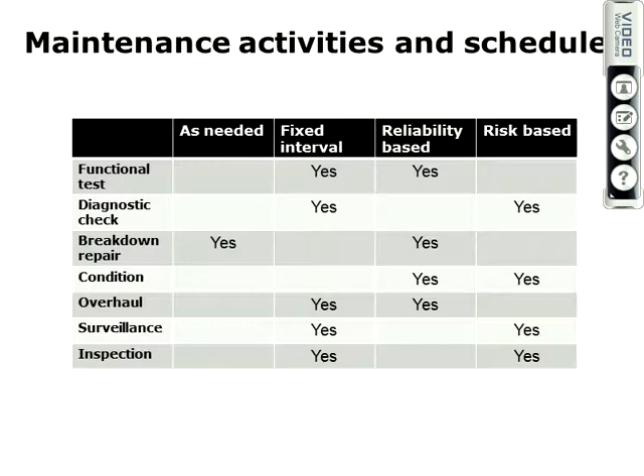Have you got any sensitivity to any environmental factors? In other words, as soon as the wind gets above a certain speed, are all the aerials going to come down? If you've got low temperature, are you going to start getting freezing up of the control equipment? Is it in a location where you could have flooding, and if it does flood, what's it going to do? Is it going to fail safe, or is it going to give you a problem? And is it secured?

This is becoming more important now, mainly with the threat of terrorist activities. Certainly in the UK, the Health and Safety Executive are homing in on operator installations and asking, how would you deal with a terrorist attack?

Then telemetry. The issue is, what telemetry have you got? In most cases, if the site is well designed, because all the sites are unmanned and remotely operable, in the event that you lose all the telemetry, the site should continue to operate. The issue is, if you lose all the telemetry, you won't know what it's doing, but it should still be operating. And therefore, the level of telemetry you've got may affect your approach. If you've got full telemetry and good telemetry records, you may say, actually, we're going to skip the routine check next month because everything seems to be okay.

Right. Is everybody okay with that?

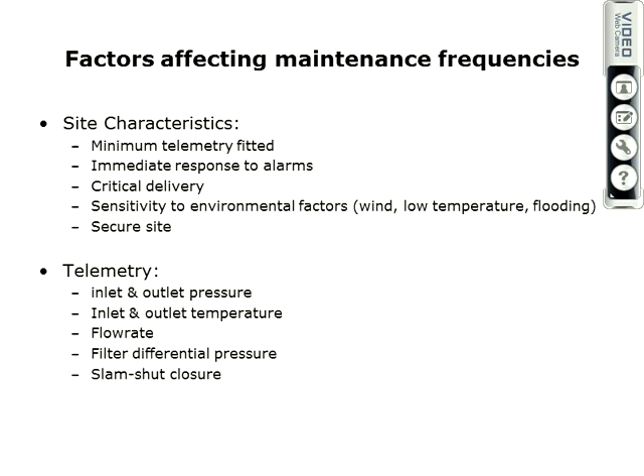That gives you a base level of integrity, okay? And then you've got to think, well, what could happen on an ongoing basis that could reduce that integrity? That's where you start looking at the typical damage mechanisms that could affect it: fatigue, corrosion, third-party damage, mechanical failure, or ground movement.

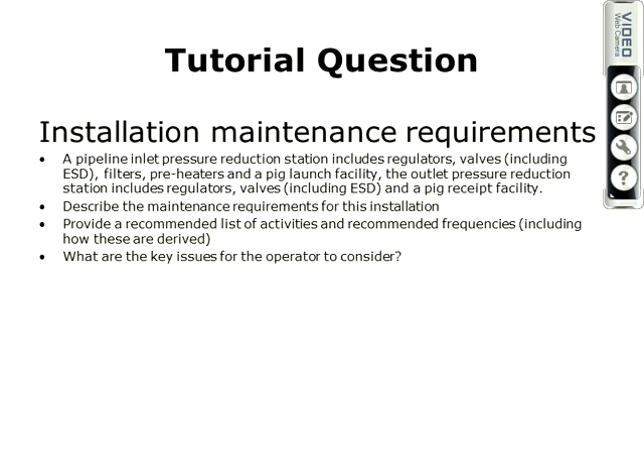The activities you actually apply to control all of those things are the operational activities we talked about, which are all to do with setting limits and monitoring how the system's performing, making sure that it's operating within its pressure and temperature boundaries. And surveillance, as we talked about earlier this morning.

Surveillance is probably one of the most important activities that you carry out on a pipeline, simply because pipelines are expensive, and they do carry large amounts of inventory, and you've got them in locations where third parties can cause damage and disruption. Then there's inspection, maintenance, and non-routine activities.

In the case of surveillance for a cross-country pipeline, do the helicopter surveys have boundaries like countries, or is it stopped? So you're talking about where pipelines cross country boundaries. That's an operator issue. The operator cannot not survey just because the pipeline is going through another country. This is to do with the contractual agreements set up at the beginning. So if you're building a cross-country pipeline which crosses borders, it's essential before you start operating it that you've got all the agreements in place to allow you to carry out all of the activities that are needed.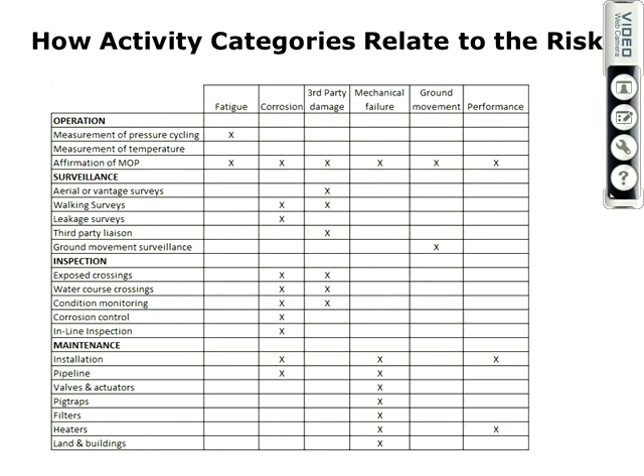In the event that work needs to be carried out in the vicinity of the pipeline, you should go out and mark the pipeline route, and this doesn't just mean with pipeline markers—if somebody's going to be digging up a field and your pipeline goes through it, you actually mark where the pipeline is across that field. In reality, you should be there to supervise the work, along with liaison with landowners and other key stakeholder groups, typically contractors who do work in the area.

You've got to manage a third-party inquiry process. In other words, if somebody is going to do work in the vicinity of the pipeline, they should know the pipeline's there, and they should be able to contact the operator and ask for any additional information if they need it. And then finally, the surveillance, either aerial or vantage point.

The issue with third-party damage, this is the typical process safety Swiss cheese model, where you've got a number of activities that you're carrying out, but none of those activities are going to control it properly. So you've got to apply a portfolio of activities, and you've got to recognise the strengths and weaknesses of each activity.

Okay, this is just a more detailed assessment of surveillance. So aerial surveillance is the most typical surveillance technique, as we covered earlier on. It's very good at recording any encroachments or work that could affect the pipeline, and also any developments that are starting to occur. And the recommended frequency, in other words, all of the pipeline codes will tell you to carry that out every 2 weeks.

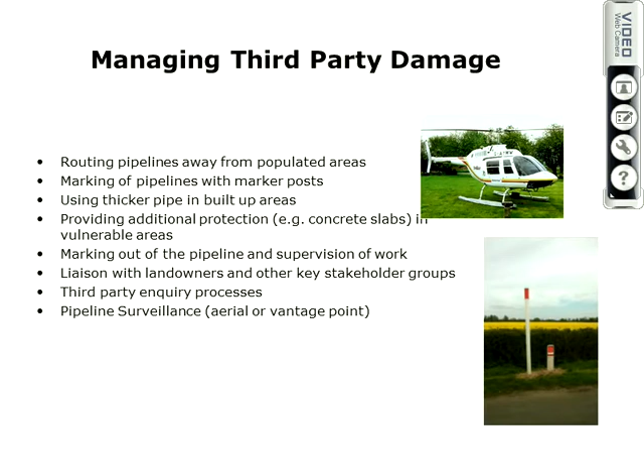Then you've got vantage point survey. That is exactly the same as aerial survey, because you do a vantage point survey when you can't do an aerial survey. So there may always be parts of a pipeline route that you can't actually carry out aerial surveillance over. In particular, if the pipeline's routed through an area where aircraft activity is limited, you may not be able to do aerial surveillance, so then you've got to do vantage point.

Walking surveys. Typically, that would be risk-based, or probably once every 4 years. In some areas, every 4 years is not adequate - you really need to do them more frequently than that, because what you're looking at there is the condition of the markers, above ground crossings, pipeline cover, etc., which may depend on where the pipeline is.

And then finally, we've got leakage surveys. Normally you would carry out some sort of leakage survey on a new pipeline just to check that any joints are actually made up properly. For older pipelines, if you've got components on them which could be the source of leakage, for example pipeline sleeves, or sections of pipeline not inspected online or by overline surveys, you'd also want to check.

So again, leakage survey is normally very much something operators will only do based on a risk assessment. They'll say, if I do a leakage survey, am I actually going to pick anything up? And if I do pick anything up, where are the locations that's likely to happen, and I'll just survey those locations.

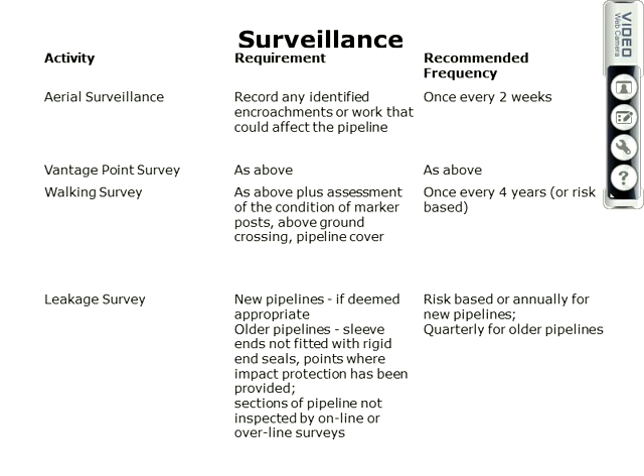Watercourse crossings - the issue here is the pipeline profile beneath the watercourse. In many recent pipelines, they've probably been bored under the water crossing, so there won't be an issue. But for some older or less important water crossings, they may just be laid on the bottom of the watercourse, so they can be subject to damage. And if they're on a riverbed, there's the possibility the riverbed may change.

These recommended frequencies are essentially taken from the pipeline codes. For internal inspection, it really should be geared towards what damage you think the pipeline is going to see and what you want to detect. Typically, a fingerprint inspection at the beginning of life might be required to identify any material defects in the pipeline, and also any construction defects such as dents or wrinkles which have been introduced.

Then you do regular inspection looking for damage mechanisms you've identified as being most significant. Most of the significant inspections will be metal loss, but in some cases it might be cracking as well. Internal inspection is generally based on a frequency that's risk-based, so you look at the corrosion rate you might be expecting. If you don't do a risk-based assessment, the codes will generally tell you to inspect at least every 10 years. But if you inspect every 10 years, in some cases there might be things you miss, so that in itself can be a bit of a risk.

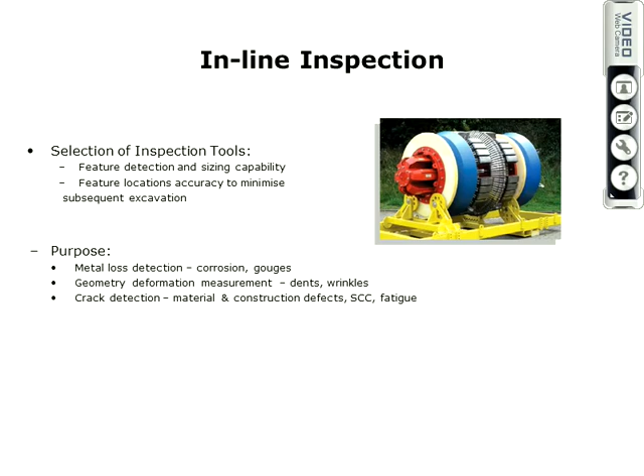And just a political point here: there's been a view, certainly in the UK, that techniques like these are just like magic wands and don't really give you a lot of detailed information. Operators have pushed down the costs of doing these surveys so much that in the end the surveys are not being carried out properly and aren't giving decent information. If you've got a problem with corrosion protection or coating condition, operators will generally pay lots of money to get this done properly, so it is very important. But just because it's done regularly doesn't mean what's done is any good, and that applies to both CIPS and DCVG.

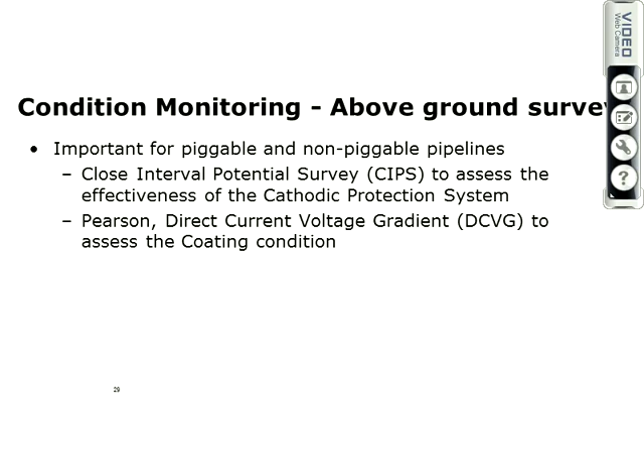CIPS and DCVG are very important, but you've got to bear in mind they are subject to location. In street locations or at road and rail crossings, in particular, electrical interference is a big problem at the moment. Where you've got particular problems, you may need to go to additional survey techniques such as electromagnetic current attenuation or long-range ultrasonics, which are techniques you can use not necessarily along the length of the pipeline, but at specific locations.

There's a couple of explanations as to what these are. The accuracy of these techniques is very much dependent on the locations they're being applied at, and also the expertise of the people applying them.

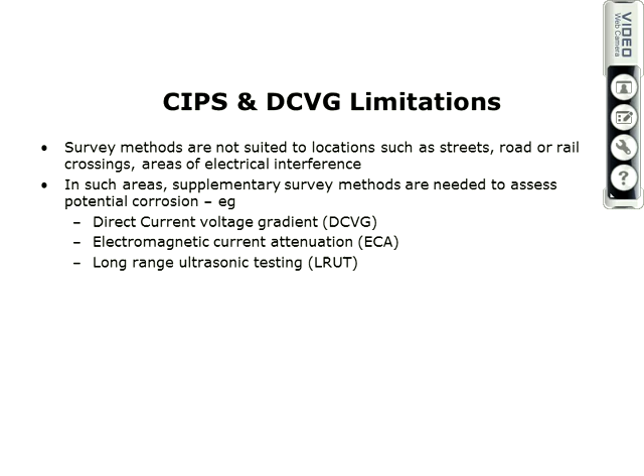Pipeline sleeves - it depends what sort of sleeves you've got and how good they are, which is why you would move from a set frequency to a risk-based frequency.

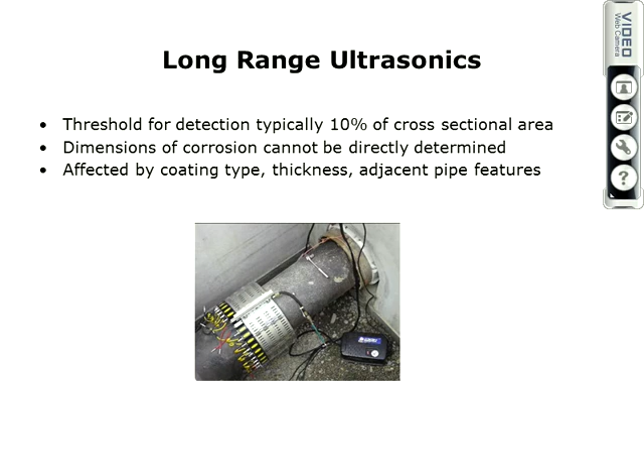Valves and valve actuators are very important, and often what operators find - if you look at the incident histories, for example some of the incidents we talked about at the safety lecture - is that valves are on pipelines to isolate sections when needed. In general you don't want to isolate sections, so you don't worry much about the valves. The problem is if you ever do need to isolate and you've got a problem with the valve, you've got a much bigger problem to manage. So typically they'd be set at an annual frequency or risk-based.

And then pig traps - the issue here is mainly the seals, the door seals, and the fastening mechanism of the doors. They're the major source of safety failures that have occurred. But obviously pig traps are large pressure vessels, so they've got to be dealt with as such. Typically they'd be risk-based or once every 10 years. Risk-based would generally mean for a pig trap, when are you going to use it - you need to inspect and check it before you're going to use it.

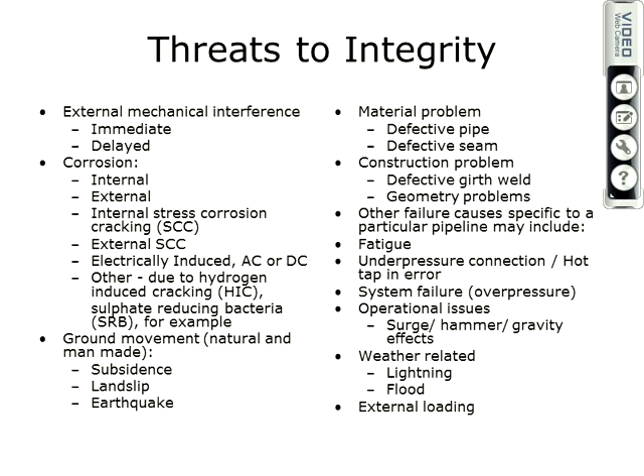Sorry, question regarding this downtime. Previously...

Yeah, well, certainly in some cases, the downtime might be a cost. In other cases, it might not be a cost - it just might not be possible. So, for example, depending what the contractual arrangements you've got are for delivery of whatever, whether it's gas or aviation fuel or whatever, the contractual commitments you've set up to might not allow you to have any downtime.

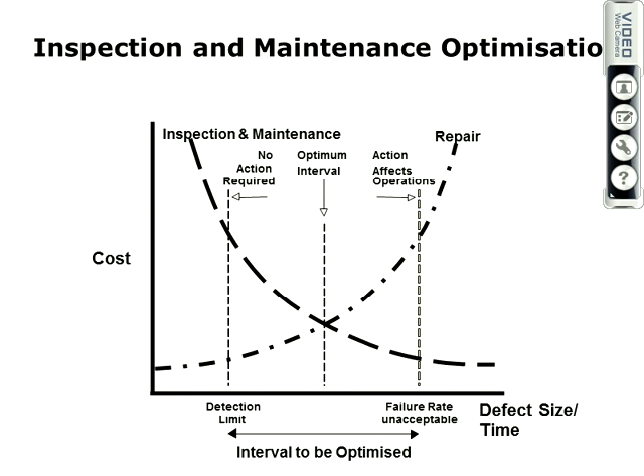Okay, that's just a very simple assessment of what sort of damage you might be dealing with in terms of what you need to look for and then what you need to do when you find it. In terms of external interference, remember external interference is a random event. If it happens, you've got no choice about when you decide to inspect it. If you think you've had external interference, you've got to inspect it straight away, because that's the type of damage that's most likely to have occurred, most of which will be serious in terms of integrity.

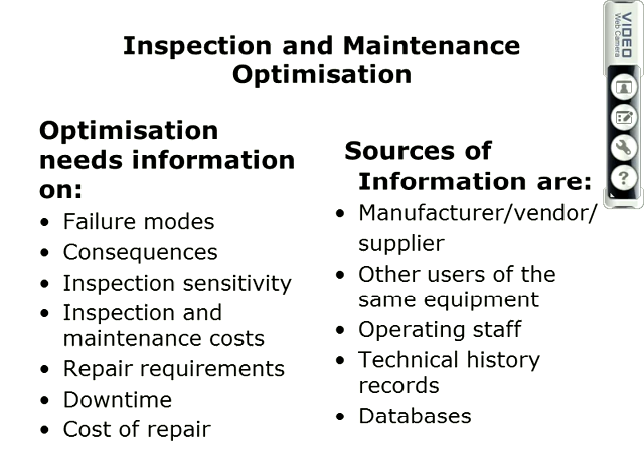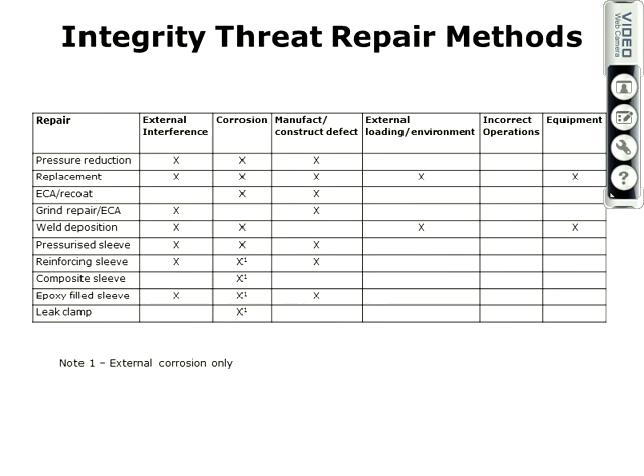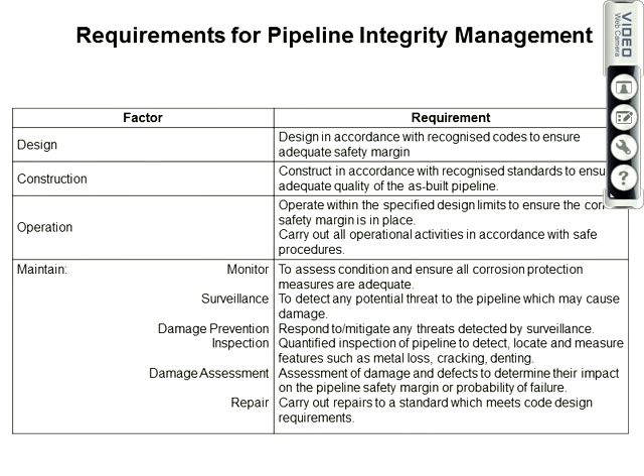Right. So based on the way I've covered this topic, I'm going to always ask you - you're not going to have a pipeline that doesn't have anything else associated with it.

If you're going to maintain it, you need to think about what's associated with it: an explanation of the surveillance method and frequency, and the additional activities required after surveillance. If you get a sighting reported in surveillance, you have to investigate. That may mean going to see the landowner to get access and have them stop what they're doing, supervising work being done near the pipeline, or doing a risk assessment.

List of activities to be carried out and their recommended frequencies. In this case I've said time-based maintenance philosophy, because most pipeline activities will be either time-based or risk-based. If I ask you this question in an exam, I don't want you to just say 'risk-based' ten times — that won't get you any marks.

Is that all right? Does anybody want to go through and talk about anything in more detail? Are you all happy that I've given you enough information to answer questions like that? Looks like we've got a 12 o'clock lecture in this room. Is everybody okay? Right, well, thank you for your attention, and I'll see you back here at 2 o'clock.